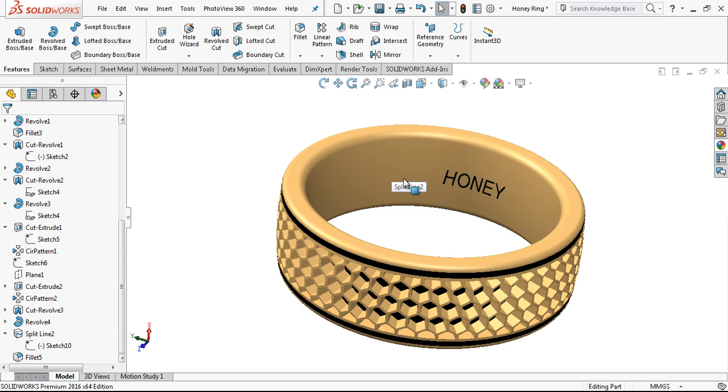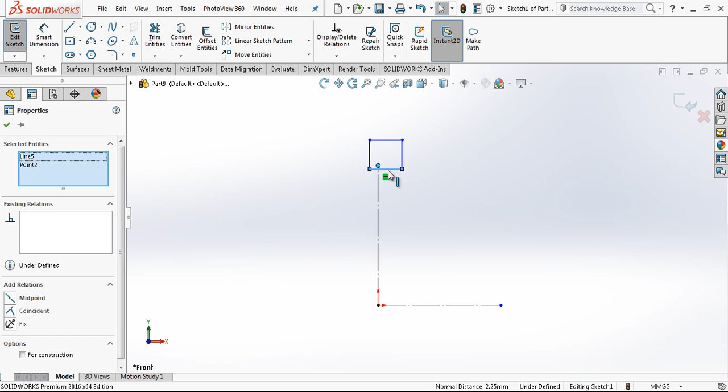Let's start by opening a new part and in a front plane a new sketch. I'm creating one construction line vertically and the other horizontal, and creating here one rectangle. By this point and this edge I'm giving a midpoint option by selecting two objects and just with a control button in the keyboard. Inner diameter is 22, height is 2.5, and width is 8mm.

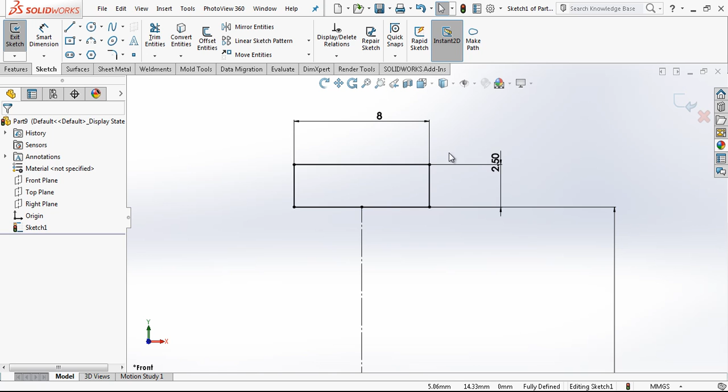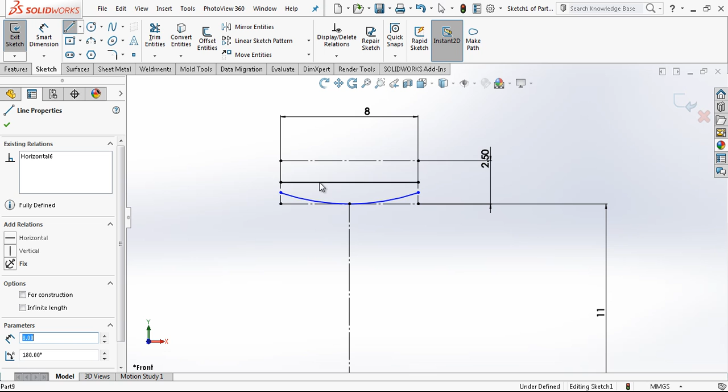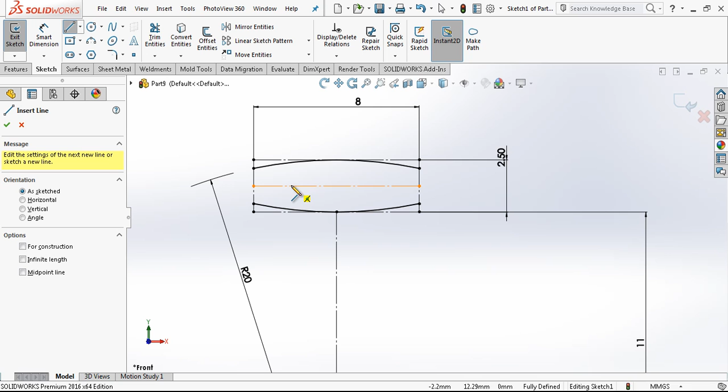After that I'm just selecting one edge and select chain, everything in construction line. And I place here one arc, and I will make a mirror, and here one extra construction line. This line will be mirrored on this construction geometry. Two points will be in the same line, which is symmetric, and radius is 20. And I just close my contour.

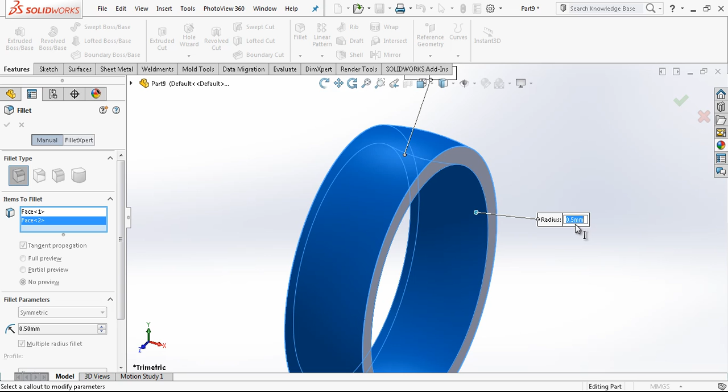At this point we just make revolve, and we are going to make fillet 0.5, and we can make multiple fillet. Here we can give 0.75, and the outer surface which is connected to this two edges is going to be 0.5.

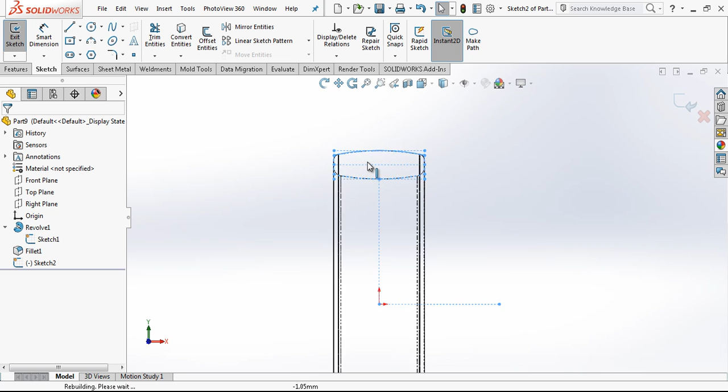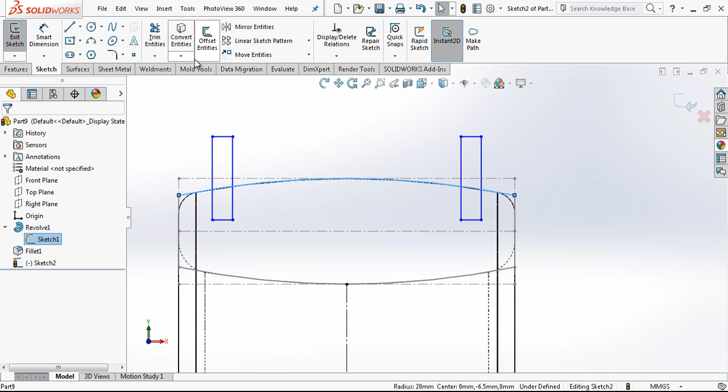After this point we are just going to cut out some material on the front plane sketch, and we can use the old sketch. I create here one rectangle, converting the old construction line, and with mirror, making here mirror and taking the old edge from old sketch and cutting unnecessary parts.

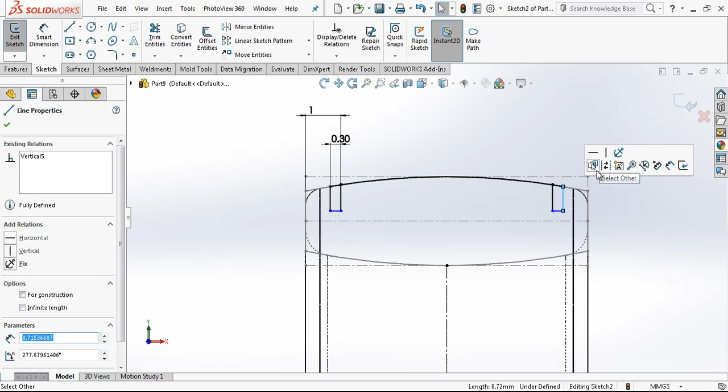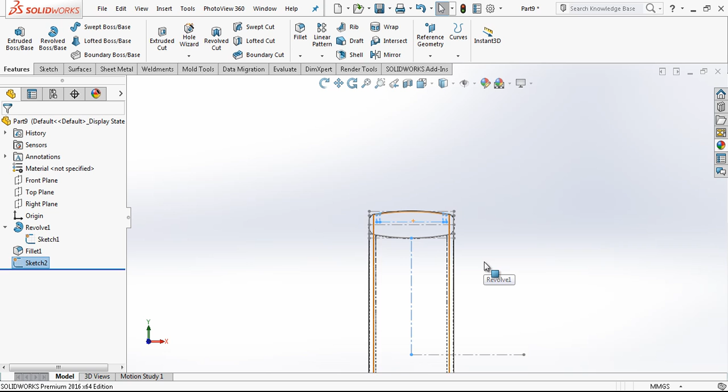0.3mm vertical, and from edge to here going to be 1. Connect bottom, and from here to here we say 12.5, and inside also must go. After this point we just make a revolve cut on this axis.

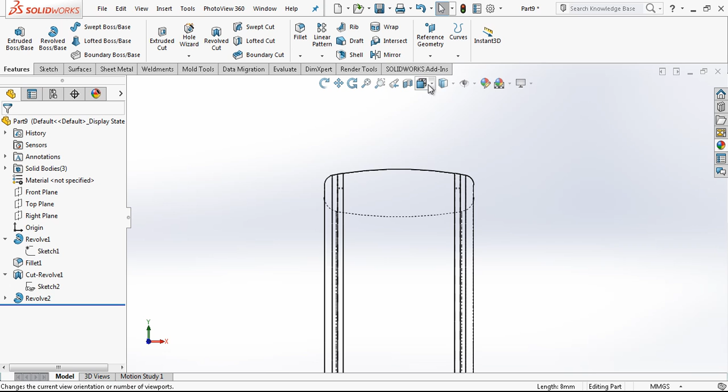After this operation, with the same sketch I am making revolve, and no merge result. Let's check together what's the conclusion.

Under the metals I will give gold to the outer ring, and I have here two strips. They are also different bodies. I will make them black.

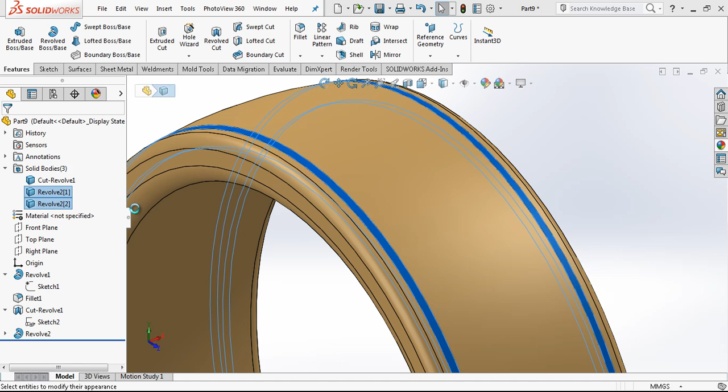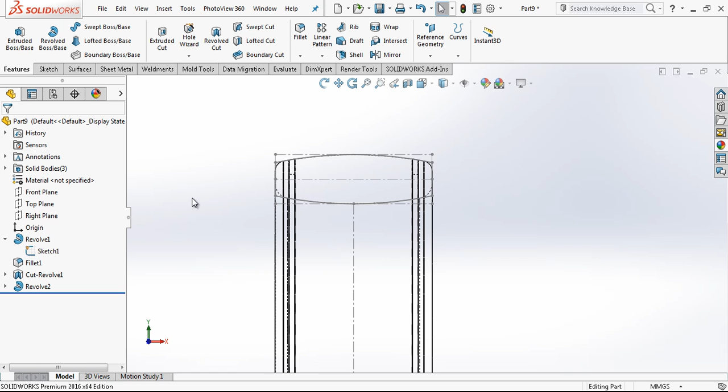Fully black. And now we are going to make one more cutout for the honeycomb area, and I'm making my visual state hidden line. After this point we create a sketch in the front plane, and I convert this line

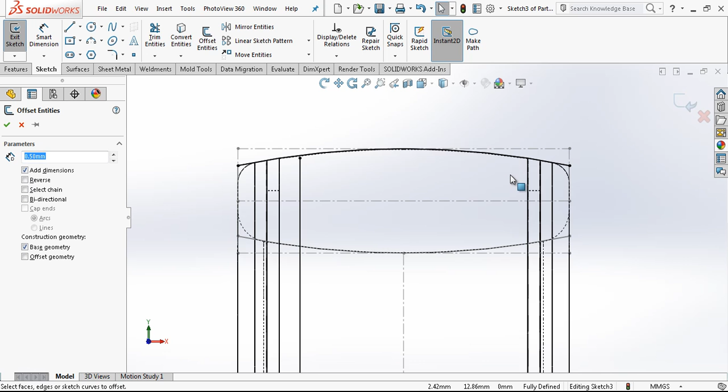and making offsets on this line like 0.5mm reverse, 0.5mm on this line, by just existing edges. I'm selecting my edges.

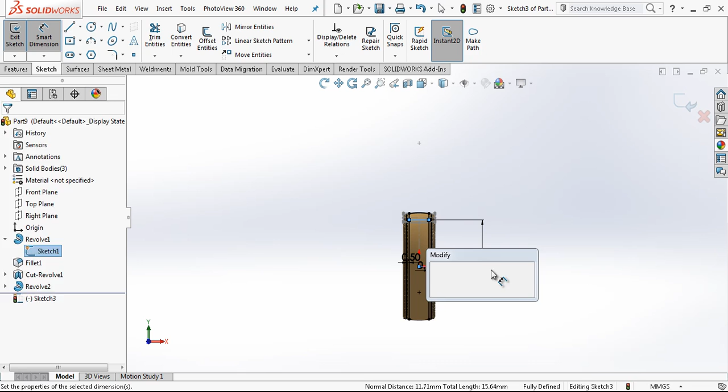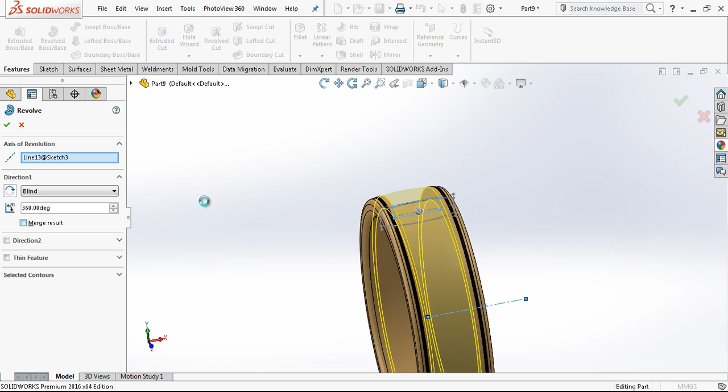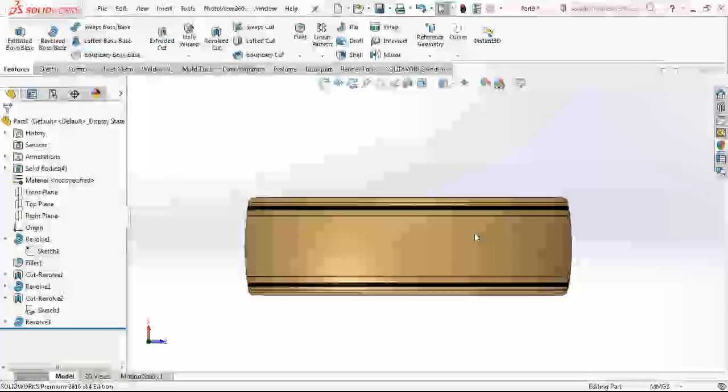After this operation we are just going to cut our first cutout for gold honeycomb, and on the right plane I am creating a sketch and touching exactly where my outer point surface is, and here we go create a plane on the top, and then now we just make here a normal to and opening a sketch.

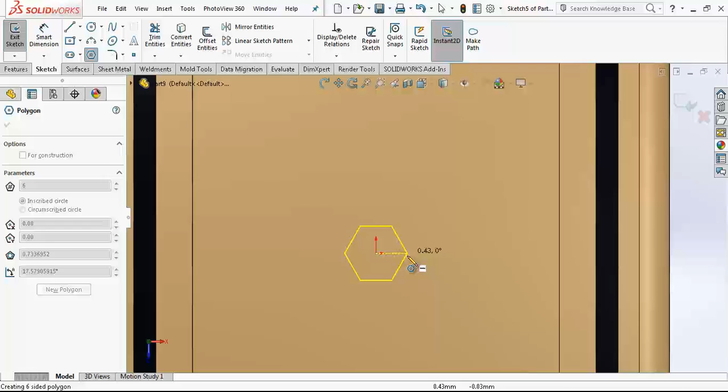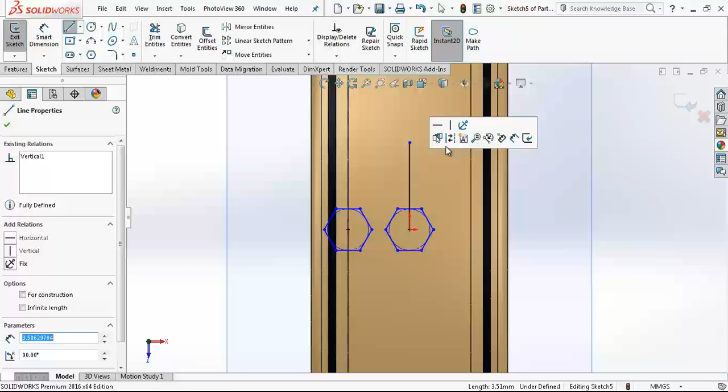First here, yes, horizontal, and the second going to be here. These should be same, equal, yes. And the other will be here, just the mirror, yes.

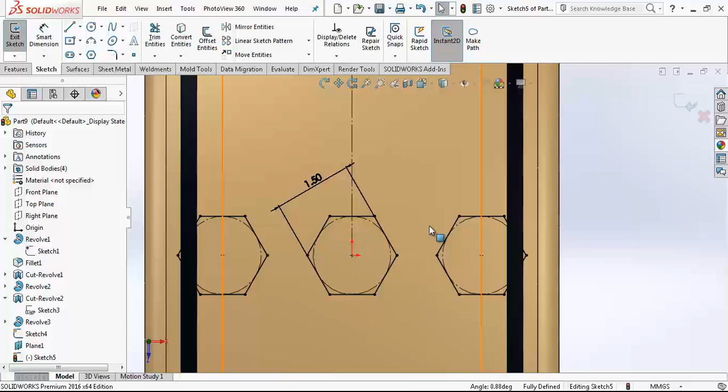Let's give a value of 1.5, and I'm going to place here one extra to understand the size, if it is right or not. Parallel, and this already will be parallel, and when I gave 1.5 millimeter

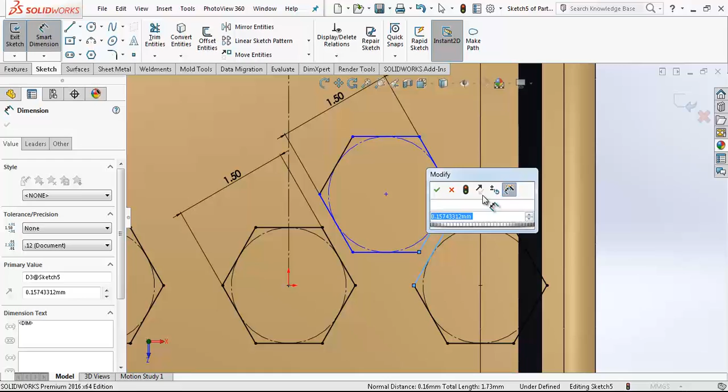with same gaps, so 0.25, well, it seems the 1.5 millimeter is a little bit big now. I will make 1.35, sorry, 1.35,

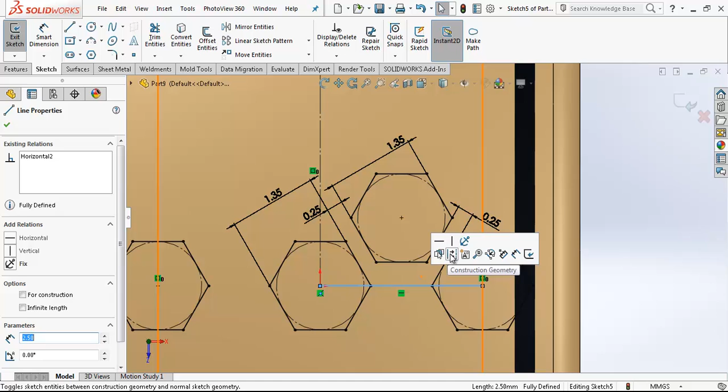because the other one, which is going to be at the other side, should be with same gap, same material thickness, mirror, and here the thing that I'm trying to say exactly here also should be 0.25, and then we will make everything equal, and then we will find the ideal dimension of the hexagons.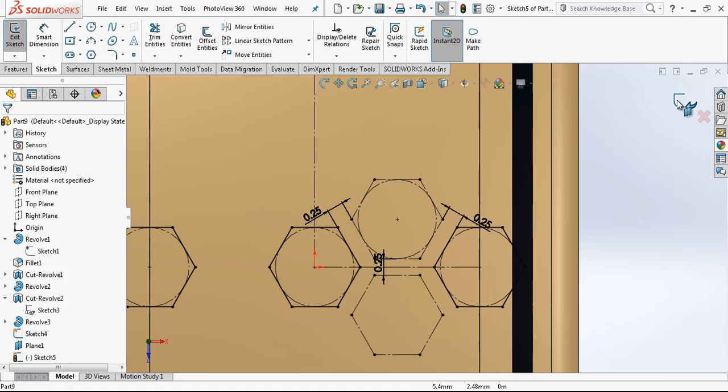We can cut the first one, sorry, and extrude cut through all, with a degree of 5 or 10, maybe 10 will be better, and the inner is going to be cut. Actually 10 I found a little bit big degree, so I will make it 7.5.

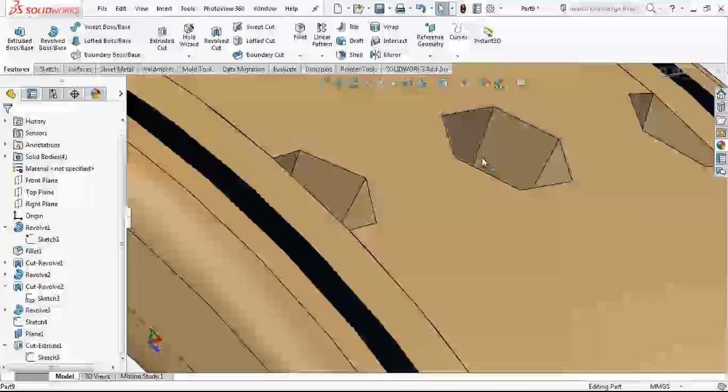After this operation we will just make a circular pattern on this edge, 50 times, or more than 50, we will find out now.

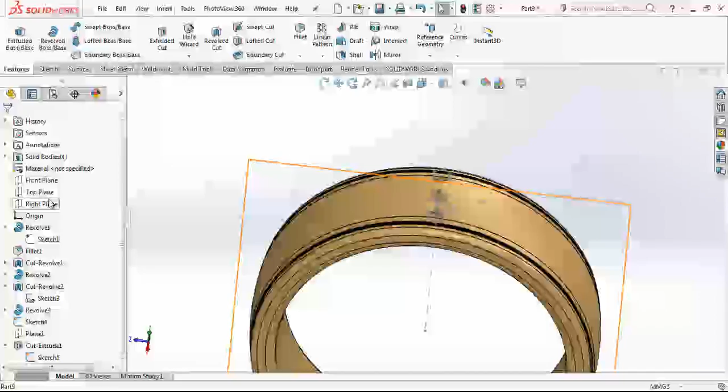Should be between these two angles. Yes, right plane. Normal to right plane. Seems this angle, yes.

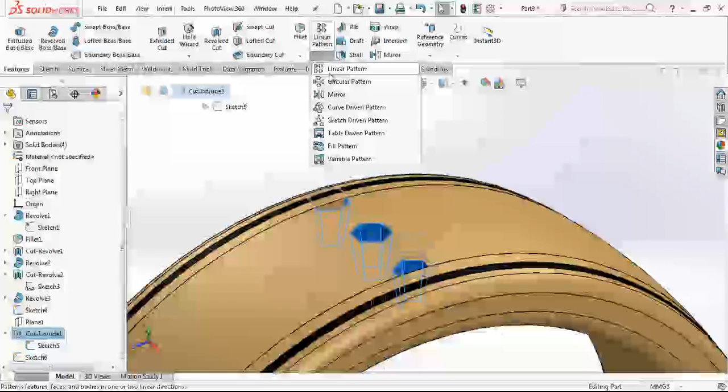Which is almost 3 degrees. This pattern is going to be multiplied. The degree will be 3.06.

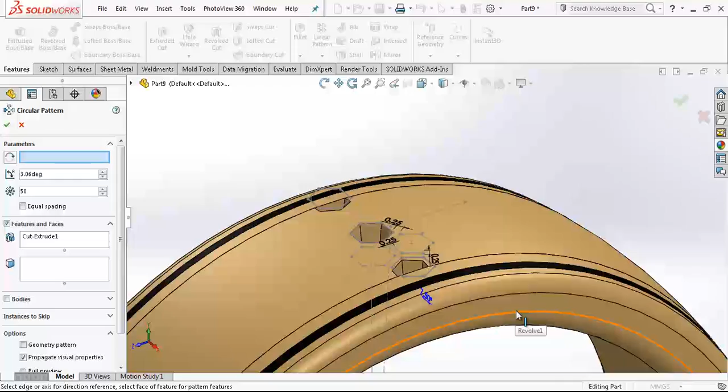Into 6.12, yes, and the number of elements that we are going to copy.

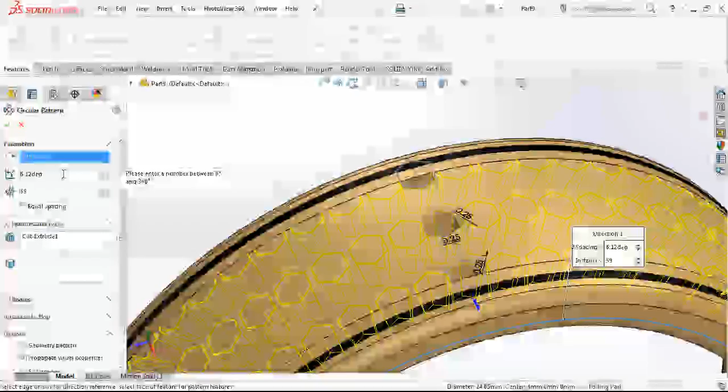Yeah, this is not a good idea. Let's make 300. This will be 360.

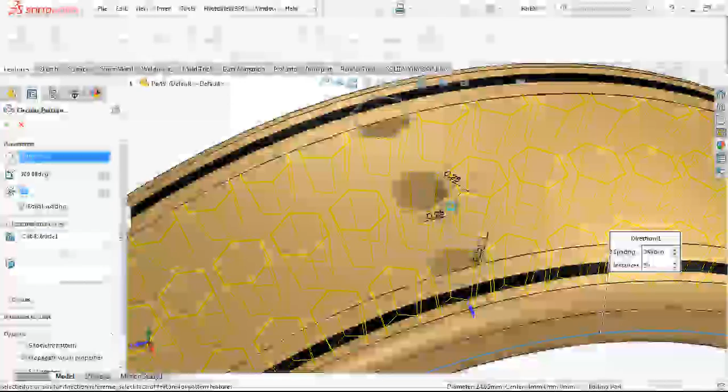Take a little bit long time, sorry. 58. And the second one will be on this line and on top of this area.

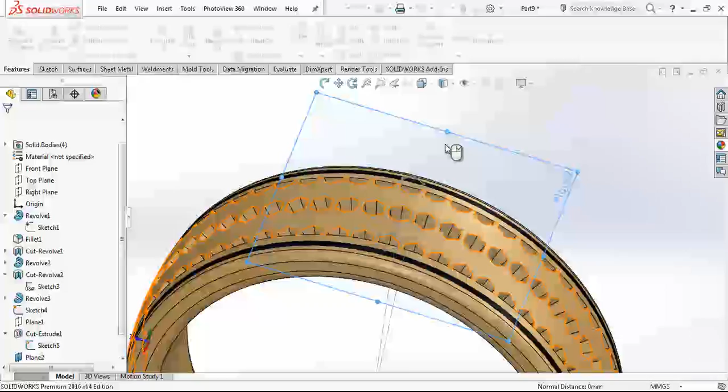Exactly, we are looking at that plane now from normal, and I will just go convert my entities.

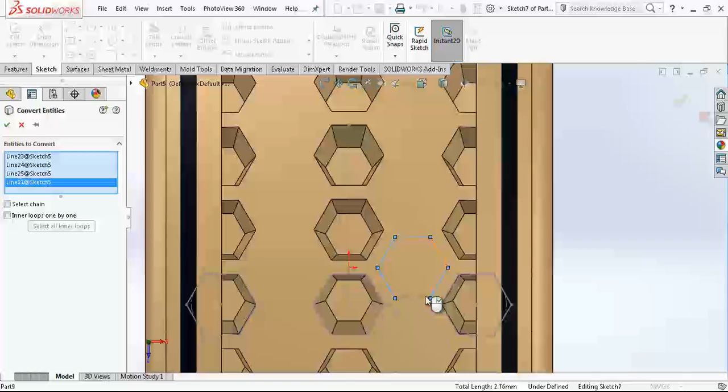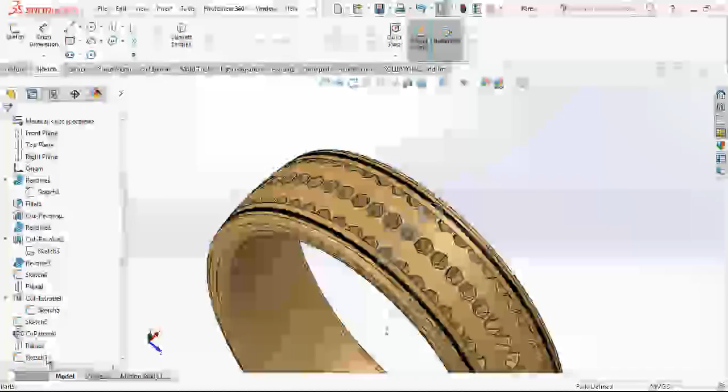After this operation, I will make here a construction geometry and make a mirror on this line, this construction geometry, and the second will also just be normal to that plane with a 7.5 degree cut.

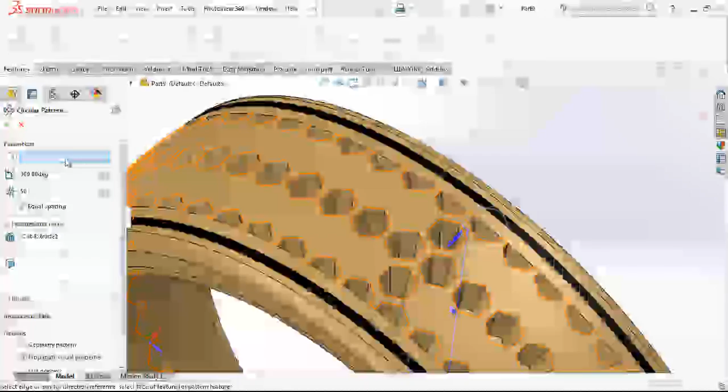And the number of copies will be the same, 58, and on this edge the program is going to create it for me. Yes, this is what we are searching for.

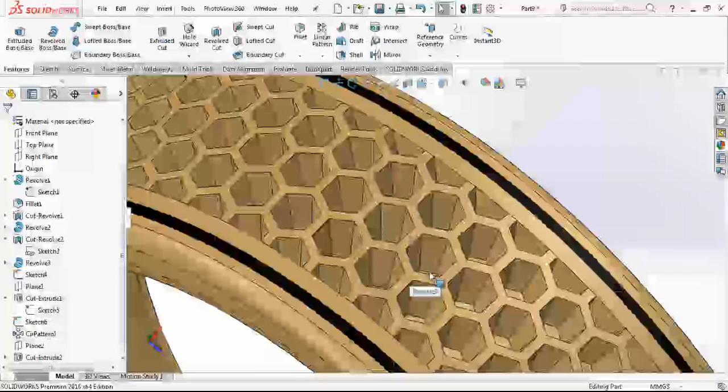We can hide now all unnecessary sketches, and in the top plane I will create a line where I can write the inscription inside.

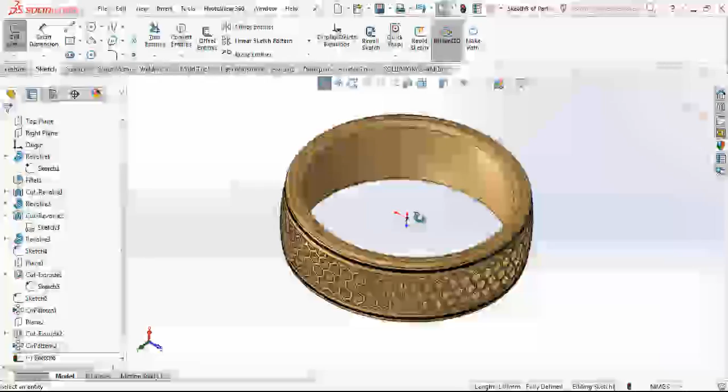Which will be 2 lines in the middle. This is 0.75, this is around 8.

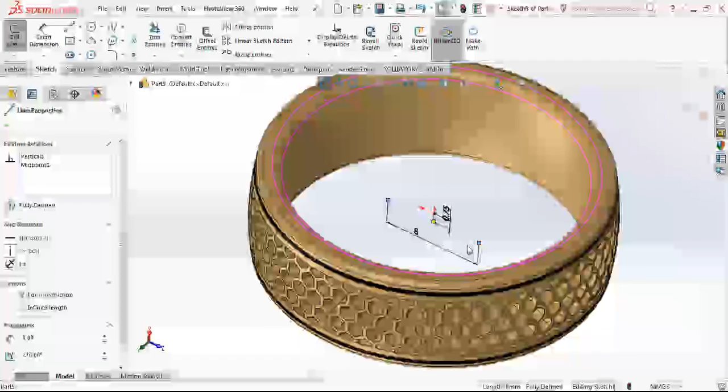And converting this the construction geometry, and we go here to text and we start to write our word 'honey', and let's try 1.75. Then the font, Times New Roman, I will say.

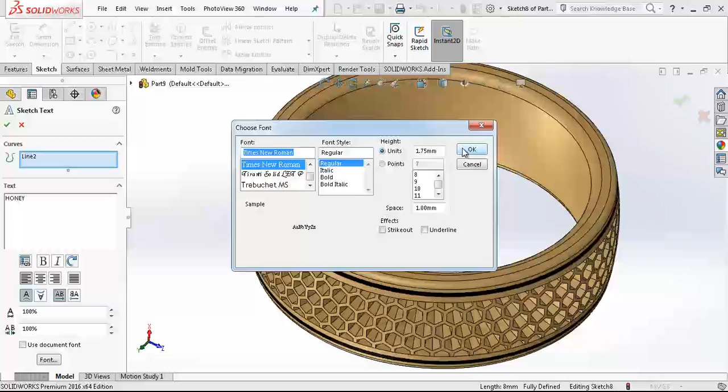You can change according to your wish, and I will just make a split on the edge and just give it a different color.

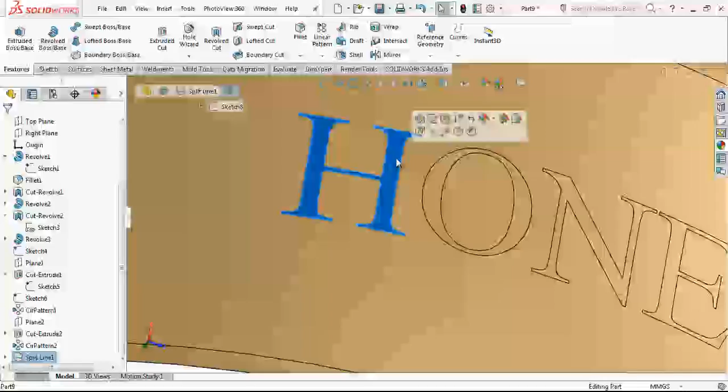We are choosing here surfaces. These are little details. When we choose appearances here, if I choose face, then the operation will only cover the face that we choose. This is also done.

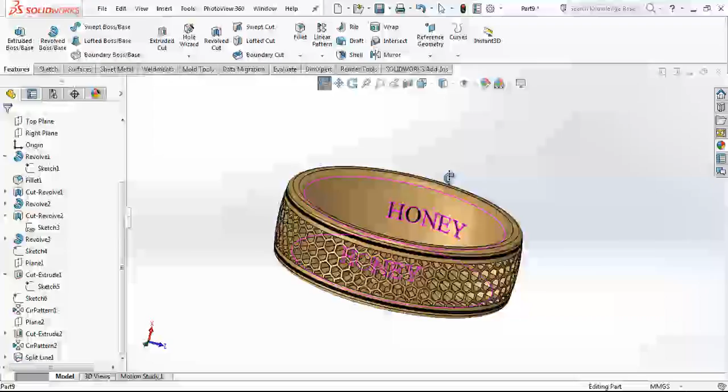And the last operation I want to make is changing the display state. In operations where there's manual calculation, I always change my display state because then the program works better.

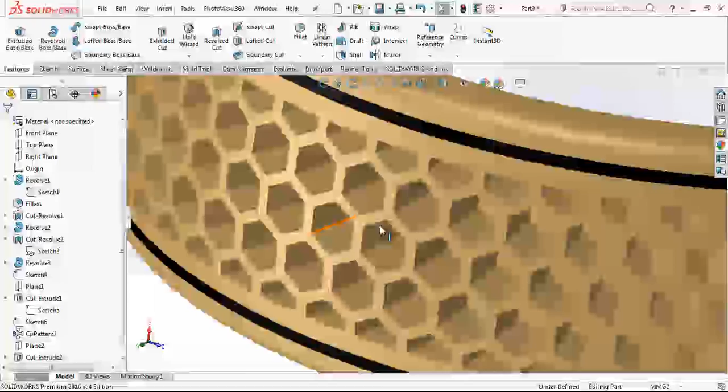I needed to stop the video because of a wrong fillet operation. We are just going to try it again now.

When we choose these two internal features, the third operation should be chosen, and the program is going to select all for me.

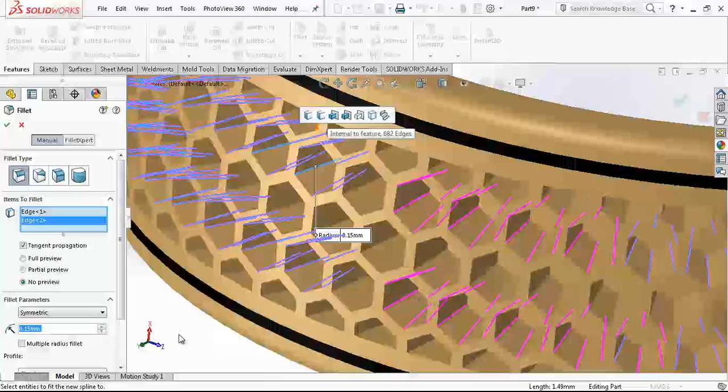Yes, I will say the first operation, okay, and then we will go further with the second. Here again, waiting a little bit. Starting, almost there. Yes, first is done, and then once we made it, we choose the second one.

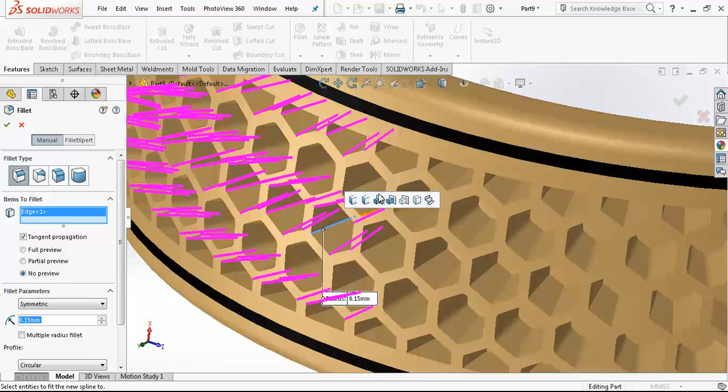This one, yes, all others, I think. Yeah, choose all others now. Program is calculating for me. And then after the second operation we will be done.

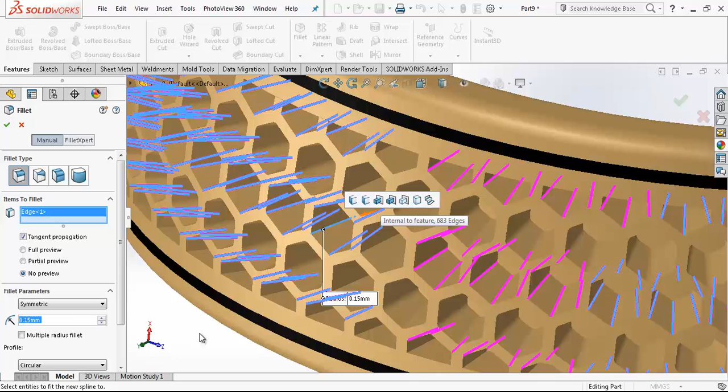It's quite a long video, I think. Yes, almost, yeah. Whenever the result comes, we are stopping the video. You guys don't like so much long videos.

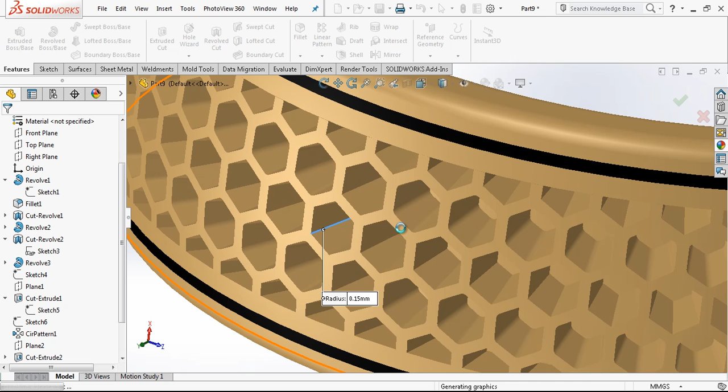Yeah, almost there, I think. Yes. Coming. Yeah, this is what we are searching for.

I think there are some missing parts. You guys can finish that operation, so I don't want the video too long.